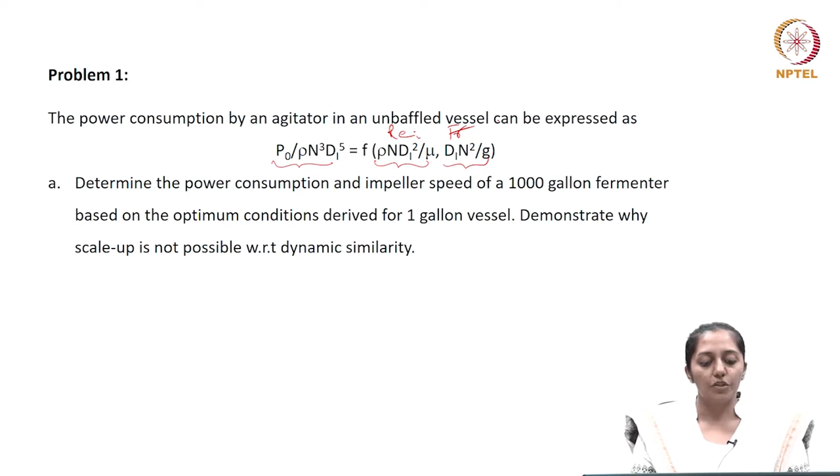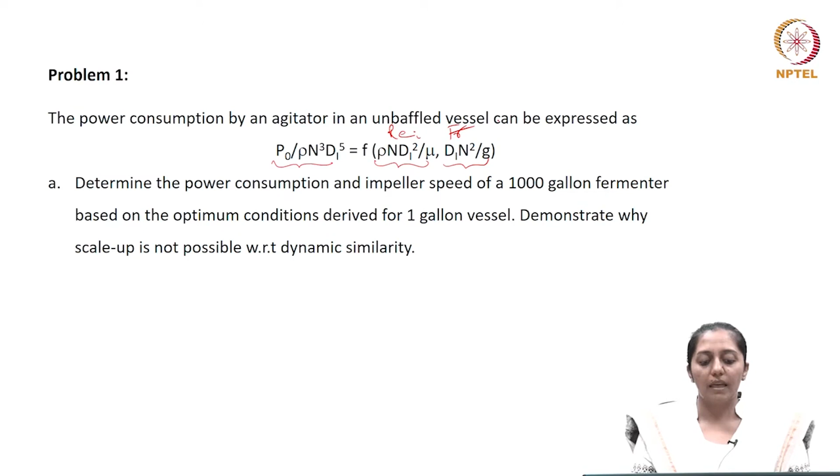Based on this correlation, we need to determine the power consumption and impeller speed of a 1000-gallon fermenter based on the optimum conditions derived using a 1-gallon vessel. We also need to demonstrate whether scale up is possible or not with respect to dynamic similarity.

Let's first look at the first part of the problem. We'll mark P for the prototype and M for the model. The volume of the prototype to the model type is increasing by 1000 folds from the model type. So this is one correlation between the volumes at the two levels.

We know now the scale ratio, which is the ratio of the linear dimensions at the model and the prototype, would be taking the cube root of this, which will be a factor of 10. So for the linear dimensions, the ratio is 10, the scale up ratio.

Now in order to achieve dynamic similarity, your dimensionless numbers should be equal at the two scales, which is the model and the prototype. And since we are using the same fluid, obviously the properties of the fluid will not change at the two scales, so we can negate those terms.

So by the equality of these dimensionless numbers for dynamic similarity, you can find a correlation between the power consumed and the impeller speed at the two levels, where we know the linear dimensions are changing by a factor of 10. Using equation 2 given here, we will get this correlation, which will correlate your power consumed with the impeller speeds at the two levels.

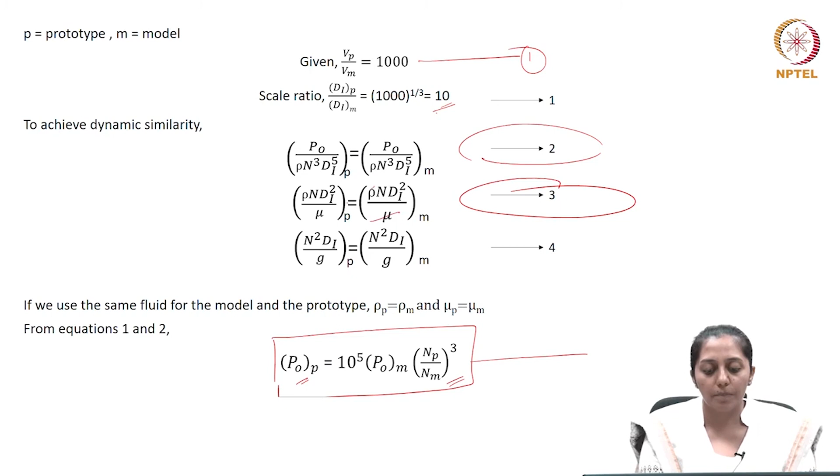While if you use Reynolds number equality as shown here in equation 3, then the liquid properties, as I said, can be negated. The linear dimensions are related by a factor of 10 at the two levels. So your impeller speeds at the two levels are correlated as given here.

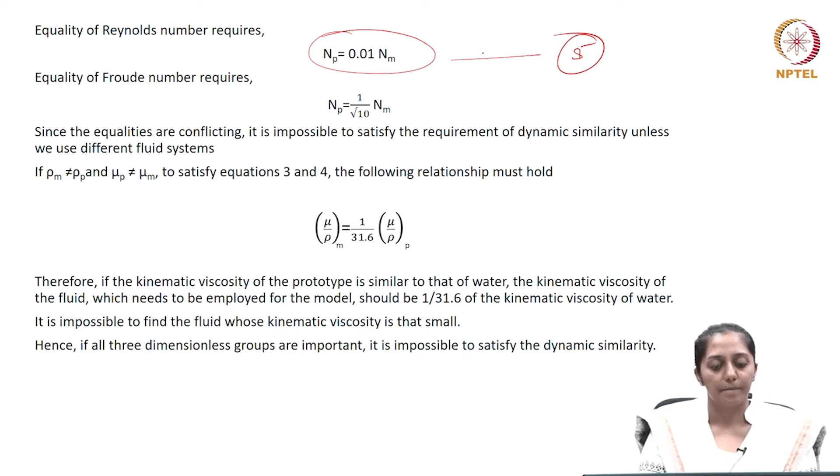We will call this equation 5. So this we will call equation 5, and this is equation 6.

So if you see equation 5, where the equality of power number was assumed, we saw that this is how power consumed and impeller speed can be related, and equality of Reynolds number gave you the correlation between the impeller speeds at the two levels as shown here.

And if you do the equality of Froude's number given in equation 4, then the linear dimension factors are known, the gravitational constant value is the same, and linear dimensions are related by a factor of 10. So your impeller speeds at prototype and model type can be related as the under root of 10.

So if you see the equality of these dimensionless numbers, it is very clear that it is very difficult to keep all the dimensionless numbers the same at the two levels, because then the equality between the operating parameters, here it is impeller speed, changes. So since the equalities are conflicting, one can make out that it is impossible to satisfy the requirement of dynamic similarity unless we change the fluid properties.

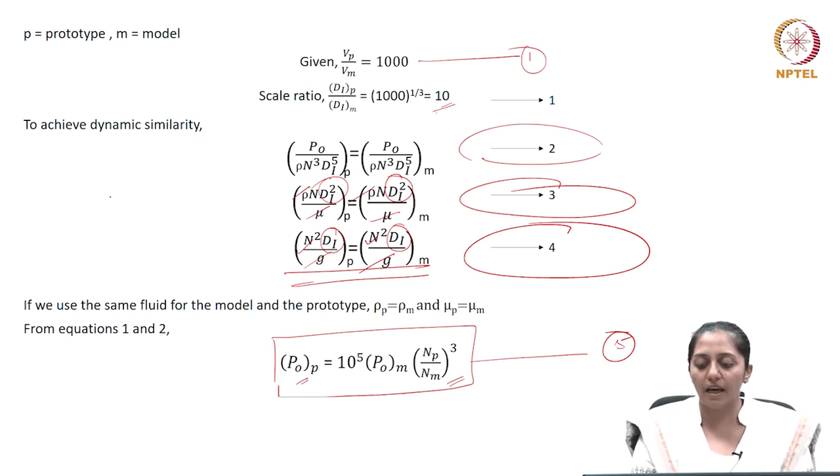So if at the model and the prototype the density and viscosity are unequal, then equation 3 and 4, where we were looking at the equality of Reynolds number and the equality of Froude's number - here the gravitational constant is the same - we will get an equality that Np is 1 by under root 10 of Nm.

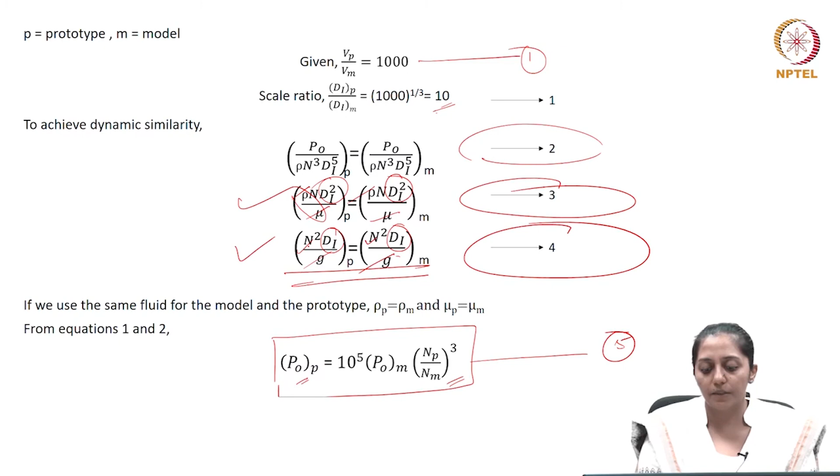If this can be substituted here, we can find how the fluid properties, the mu by rho at the prototype, will be related to mu by rho of the model type, which comes out to be changing by a factor of 31.6.

So, mu by rho is nothing but the kinematic viscosity. If the kinematic viscosity of the prototype is similar to that of water, then the kinematic viscosity of the fluid employed for the model should be 1 by 31.6 of the kinematic viscosity of water. It is impossible to find a fluid whose kinematic viscosity is that small.

Hence, all three dimensionless groups play an important role. However, keeping all of them equal at the model and the prototype to satisfy dynamic similarity is very difficult. So, one has to decide, depending on which characteristics are important—heat transfer, mass transfer, shear sensitivity, or oxygen mass transfer—which is more crucial, and use the scale up criteria.

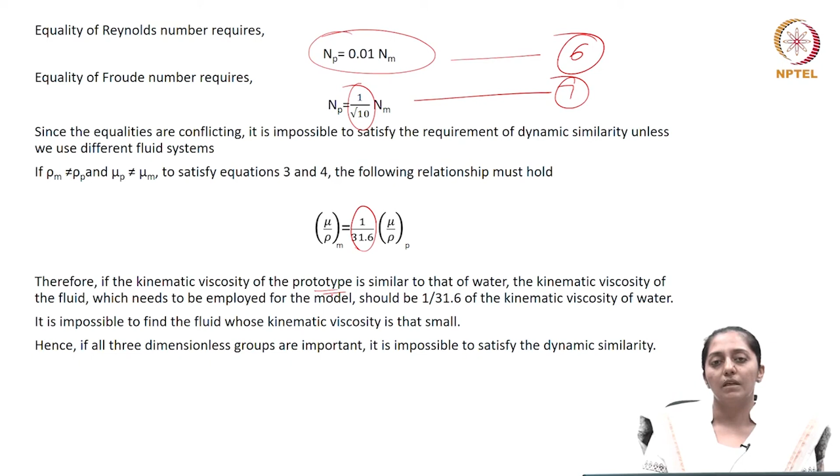Let us see problem 2. A pilot scale fermenter of diameter and liquid height, both 0.5 meters, is fitted with 4 baffles of width 1/10 of the tank diameter. Stirring is provided using a SCABA curved blade disc turbine, which is 1/3 of the tank diameter. So, the impeller diameter is 1/3 of the tank diameter. The density of the culture broth is given as 1000 kg per meter cube, and the viscosity is 5 centipoise. Optimum culture conditions are provided in the pilot scale fermenter, where the impeller speed is 185 rpm.

Following completion of the pilot studies, a larger production scale fermenter is to be constructed. The larger fermenter has a capacity of 6 meter cube and is geometrically similar to the pilot scale vessel. It is also equipped with an impeller of diameter 1/3 of the tank diameter, so again the diameter of the impeller is 1/3 of the tank diameter at the production scale. The linear dimension ratios are possibly the same. What is the power consumption in the pilot scale fermenter?

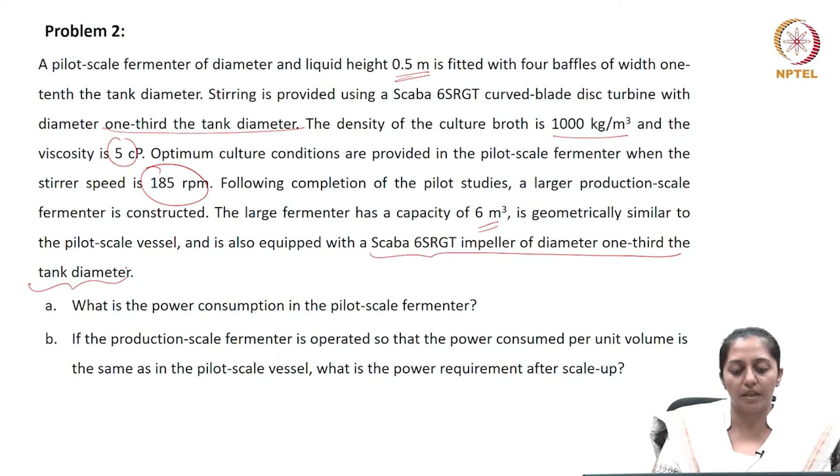So, we need to find the power consumption at the pilot scale. Let us first find out the linear dimensions. Let us list down the information provided to us. The diameter of the tank and the height of the tank, the liquid height in the tank, are the same, which is 0.5.

4 baffles are there, and the width to diameter ratio of these baffles is 1 by 10. The turbine, the impeller, has a diameter 1/3 of the tank diameter. So, the impeller diameter can be calculated as 0.5 divided by 3, which is 0.167. Density is given, viscosity is also given, and the impeller speed, the optimum impeller speed, has been provided at the pilot scale.

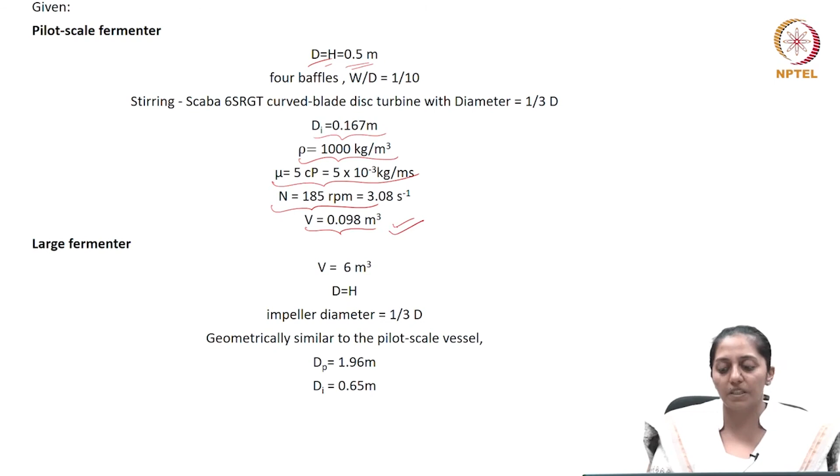So, volume can be calculated for the tank assuming it is cylindrical. Working volume can be calculated as the volume of the tank, pi r square h. So we can calculate, it comes out to be 0.098 meter cube, using the diameter of the tank and the height.

Now, for the large fermenter, the volume is given as 6 meter cube, and the diameter is the same as the height in this tank. Again, the impeller diameter is also 1/3 that of the tank diameter, so it is a geometrically similar vessel. Using the volume, we can find out the diameter of the tank, because d is equal to h. So, pi d square by 4 into h, and since d and h are equal, this becomes d cube, which is equal to 6.

So, we can calculate the value of d and find its cube root. Once we know the tank diameter, we can find out the impeller diameter, which is 1/3 of the tank diameter.

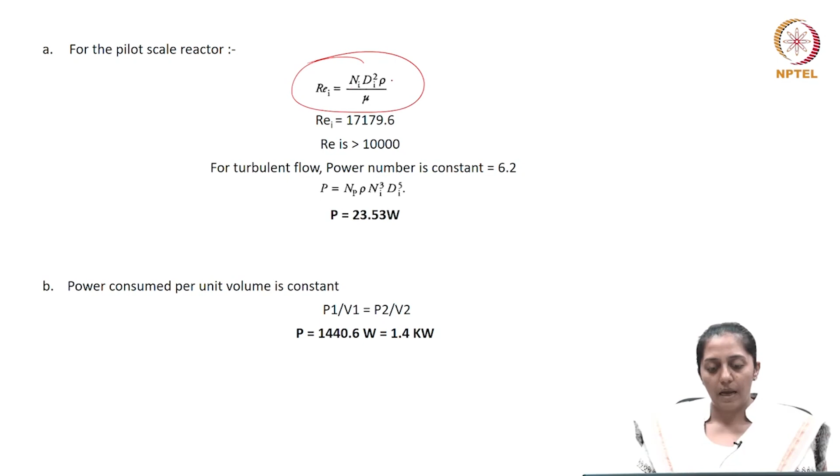Now, for the pilot scale reactor, the Reynolds number is given by the expression Ni Di square rho by mu. Viscosity and density remain the same for the fluid. The impeller diameter is known, and the impeller speed at the pilot scale level is also known, which was 185 rpm. So, we can find the Reynolds number at the pilot scale reactor. Now, this is greater than 10,000, which means it is in the turbulent region.

Now, for the turbulent region, the power number is constant, and for this kind of impeller, the 6 blade Rushton turbine Scaba, the power number has a value of 6.2.

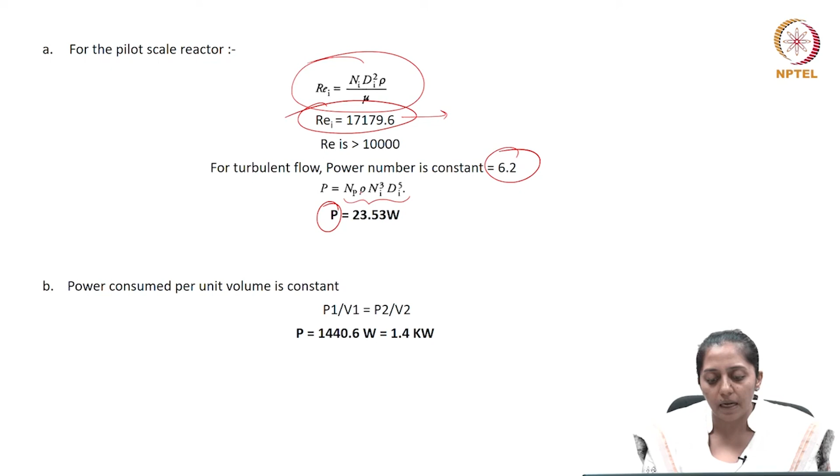Using the power number expression, we can find the power consumed at pilot scale by the value of the power number and fluid density. Impeller speed is known, and diameter of the impeller at the pilot scale is also known. So we find that the power consumed at the pilot scale is 23.5 watts. This is the power consumed in the pilot scale fermenter.

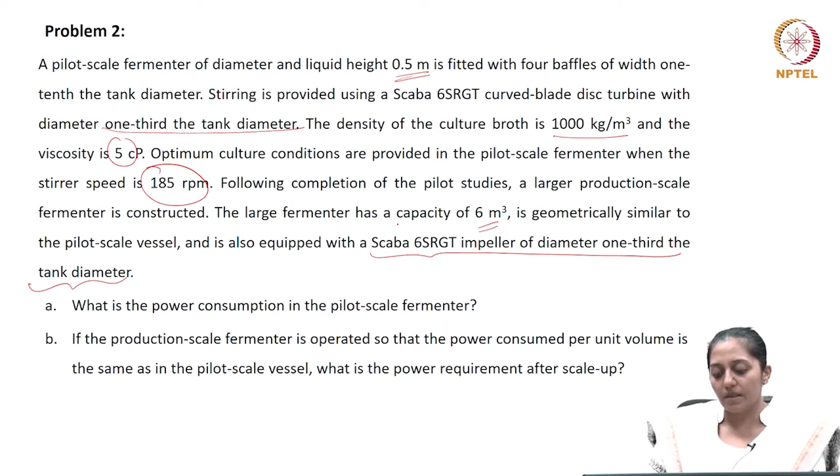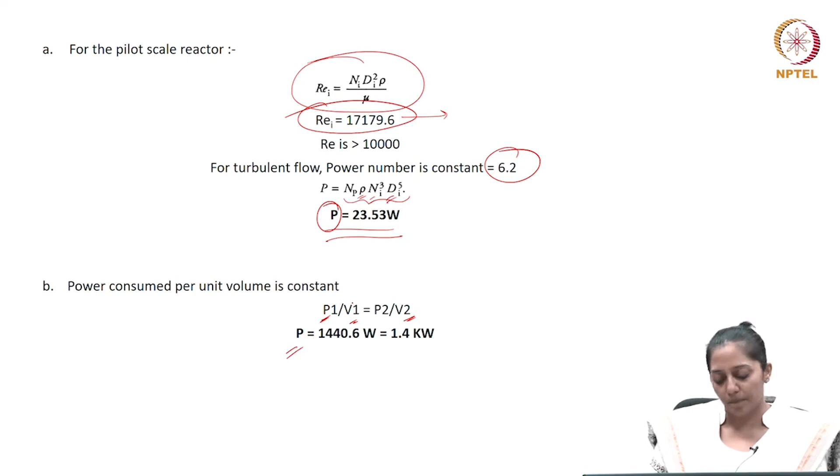Let us see part B. Part B says that if the production scale fermenter is operated so that the power consumed per unit volume is the same, our scale up criteria is power per unit volume at the pilot scale level. What is the power requirement after scale up? We need to find how the power consumed will change at the production scale. So if P by V is the scale up criteria, we can find the power consumed at the production scale, which comes out to be 1.4 kilowatt, because now the volume is known at the two scales and the power consumed at the pilot scale is known. So we can determine the power consumed at the production scale.

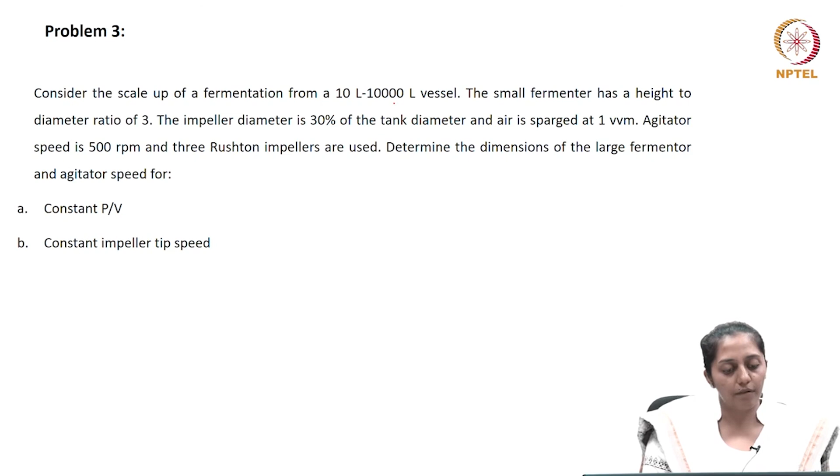Let us see problem 3. Consider the scale up of a fermentation. The small scale fermenter has a height to diameter ratio of 3. So the H by D linear dimension ratio at the small scale is given as 3. The impeller diameter is 30% of the tank diameter, so Di by D is also given as 0.3.

Q by V is given to us as 1 VVM, where Q is the volumetric gas flow rate and V is the volume. So the air sparging rate is 1 VVM. Agitator speed is 500 RPM, so N is given to us as 500. And 3 Rushton turbine impellers are being used.

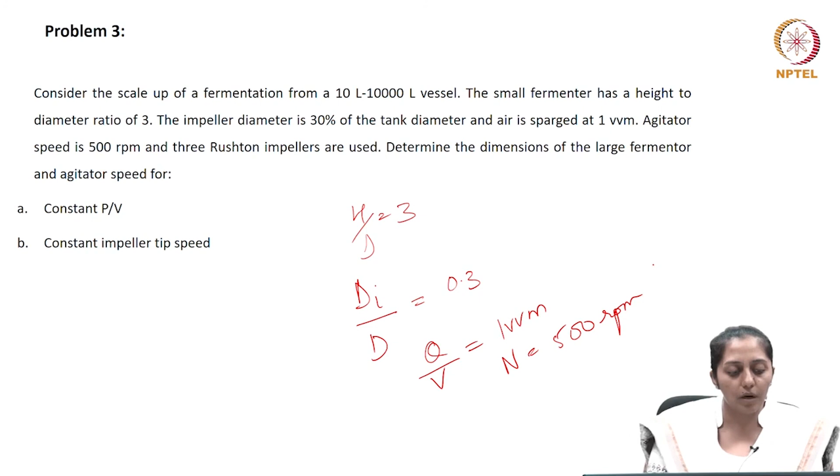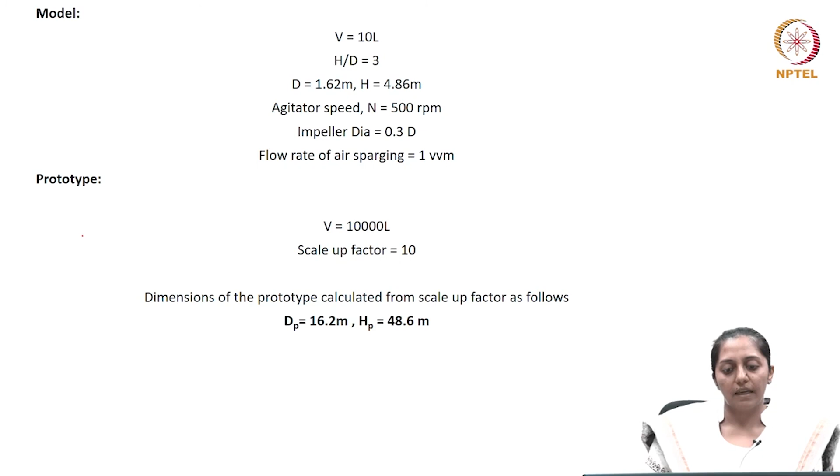We need to determine the dimension of the large fermenter and agitator speed for the scale up criteria as constant P by V. So we know that for constant P by V criteria, how impeller speed and diameter are related. Let us see that for a sparge system.

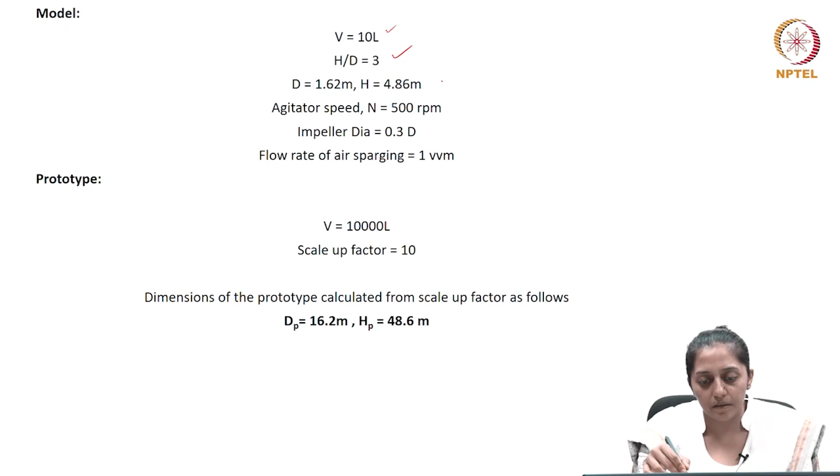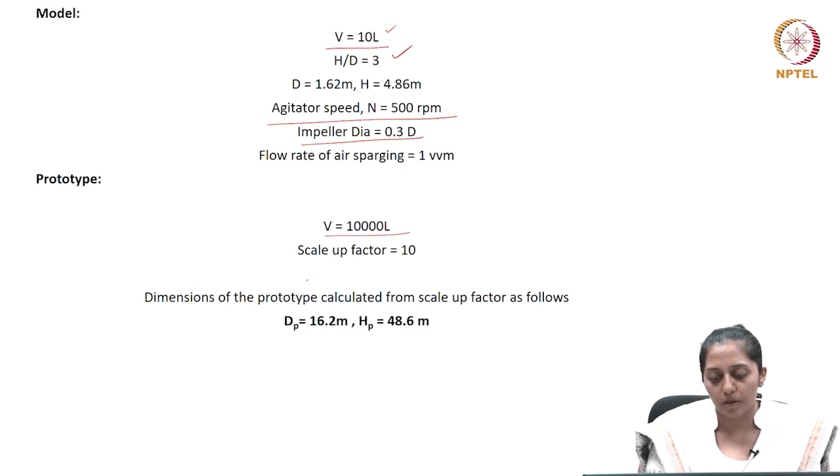Volume at the model type is given, H by D ratio is given, so the tank diameter and the height can be calculated based on the volume given. Agitator speed is 500 RPM and impeller is 0.3 times the tank diameter, so now we can also come to know the impeller diameter. At the prototype, the volume is 10,000. So we see that the scale factor for the linear dimensions is 10, which means the diameter ratios at both scales follow this factor. So your height at the production scale would be

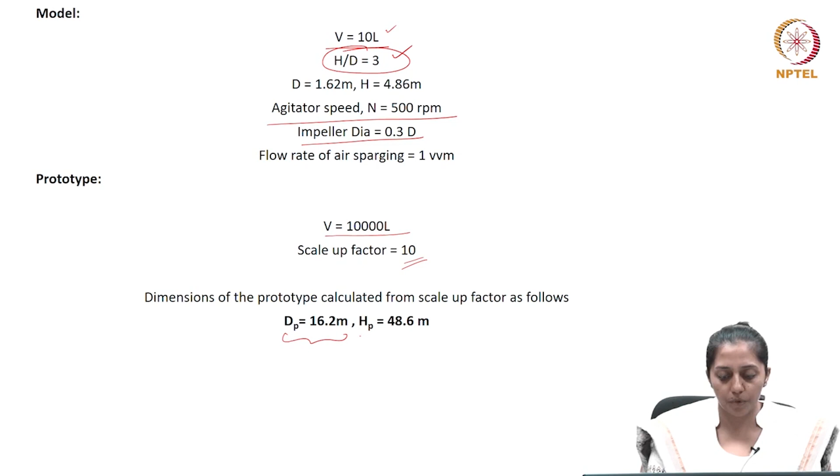3 times the diameter at the production scale, assuming the linear dimension ratios are the same, because it has geometrical similarity for scale up. So your tank diameter at the prototype and your height at the prototype level are now known.

For constant P by V, if you remember, the correlation between the impeller speed and the diameter of the impeller is shown here: N cube d square turns out to be constant. So if this is constant, for the prototype, if the impeller speed is to be calculated, we know the ratio of the diameters of the impellers, which is the linear dimension ratio of the tank, remains the same. So there is a factor of 10, and the impeller speed is 500 RPM. So we can calculate the impeller speed at the prototype.

Now, if constant impeller tip speed is the scale up criteria, then the correlation between the impeller speed and the diameter of the impeller changes as Nd equals constant. So if this is constant, we know the scale factor as 10 and the impeller speed as 500 RPM. Let us assume this is prototype and that is model type, M stands for model type.

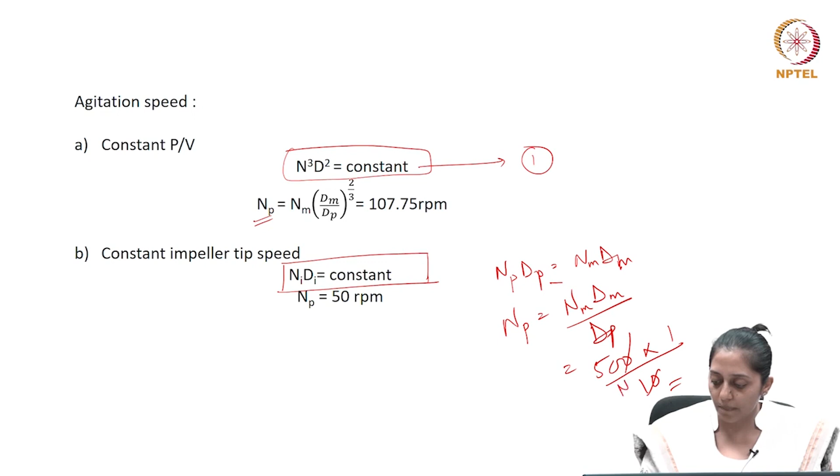So if we need to find out the RPM at the prototype with a constant impeller tip speed, it can be calculated as 1 by 10, the linear ratio being 10, a scale factor of 10. So the impeller speed at the prototype will be equal to 50 RPM with constant impeller tip speed as the scale up criteria.